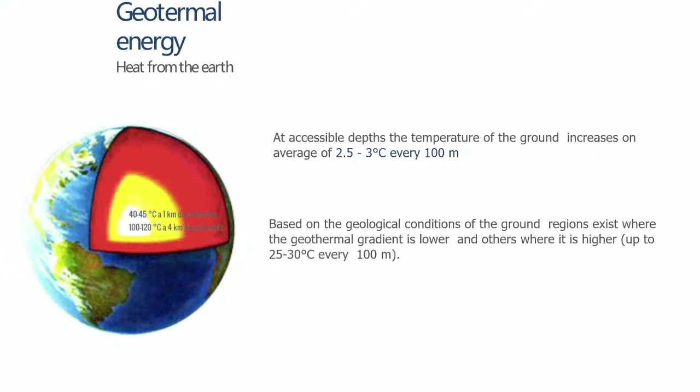In Brazil, not much, but in France, you know that now the temperature is more or less zero and probably will go down to -5, -10. And during summer, we will have more than 30 degrees at the surface. So the idea would be to go to a deeper place where the temperature is more or less stable. And if it's stable, it means we will be able to take the energy from this deeper point. If you have to cool during summer, if you have 36 degrees outside, you will be able to take the energy from the ground, which will probably be at a lower temperature.

And in winter, it will be the contrary. It means you will have -10 outside, and in your soil, probably you will have something like 15. In some places we know we have an increase of 2.5 to 3 degrees, and in other places it can be higher. So it means the efficiency of this technique should first be analyzed and designed. In France, probably we will not have the same efficiency that you will have in Brazil, and probably you will also not have the same needs.

In France, we will have to heat and to cool. Here, heating, not much, if I understand well. Yeah?

Okay, so geothermal energy, people have been using it since the Paleolithic times. The first use was for bathing. When you want hot water, you go bathing, so it's a good idea. Also in ancient Roman times. Nowadays the idea is to try to take energy for electric power.

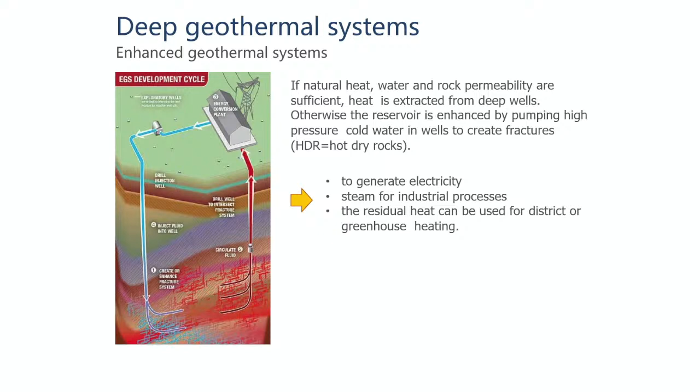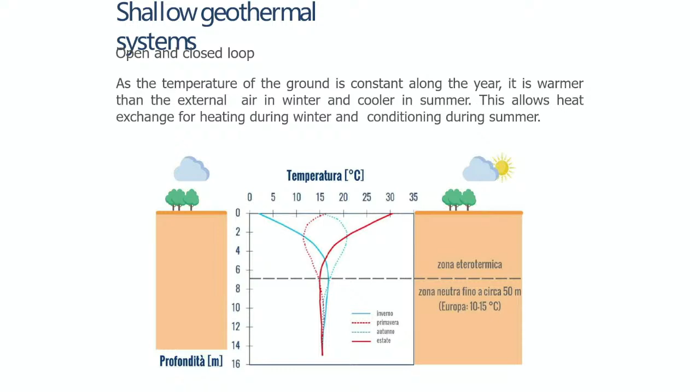So it's very interesting. At the surface, for depths inferior to 6 meters, you see that we have a big variation of temperature. So the idea, if we want to have good efficiency, is to try to have a structure deeper than 10 meters or so. Like that, you will always have a constant temperature, and you can take calories for heating or for cooling.

So it means that if you have very shallow structures at the surface, the temperature of these structures will be modified by the surface temperature, and it will decrease a lot the efficiency of your geothermal system.

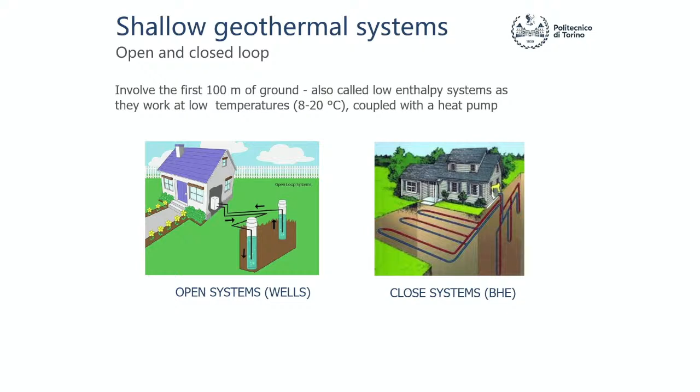So I already told you that we have open systems - these are, most of the time, not so efficient. And we have closed systems, where the input and output tube are connected. So it means that in most geotechnical structures, we will deal with the closed system with the heat pump. We will see the heat pump.

So let's deal now with energy geostructures. In geotechnics, we have more or less three kinds. We have the piles. What is important is the fact that if you have to build your structure, it's not very difficult to add some pipes inside.

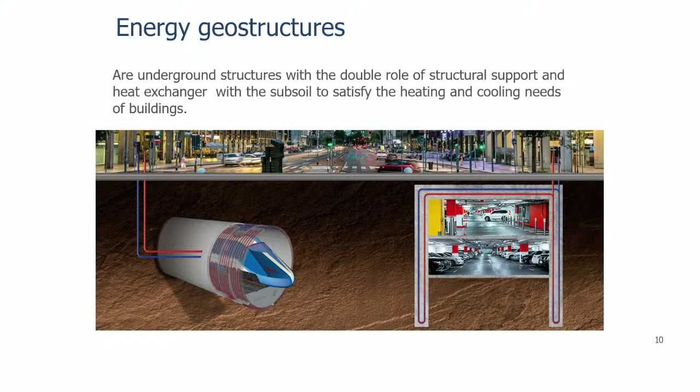In Paris, we have a lot of works now. We have the Grand Paris Express under construction - a tunnel construction of more or less 200 kilometers, so it's a very long one. Plus they are creating more or less 72 underground stations. So it means that we will create a lot of structures that can be linked with geothermal energy.

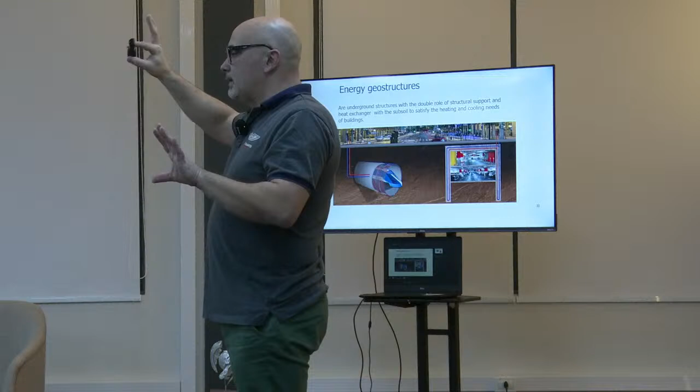But the main problem was the responsibility. They began, in some stations, to try to set some tubes, but in France - when you have to design, you have a controller who oversees it, and as the guy who controls didn't have the experience, he said no, I don't want this, so they stopped. It means that in some stations they began to set the tubes, but had to fill them back in, because the controller with no experience refused to take the responsibility. So in France, we have created a 200 kilometer line plus 72 underground stations with no geothermal energy.

So it's a pity for France, as all these lines are connected to Paris - sometimes they cross Paris, sometimes they are very close, so it's a real pity. It means that sometimes it's not possible, but it's not that it's not interesting, it's more the other parts around which do not permit that.

So I was telling about the piles - that's the first kind, Christina is working a lot on piles. But we can also use another kind of energy geostructure: the parkings. Here you see the parking. What is interesting is that one part of your parking, one part of the concrete wall, will be connected to the soil, so you can take some calories.

This can be a good energy geostructure, but the problem is that sometimes it's not so deep. Sometimes it's just 1 or 2 levels: one level is more or less 3 meters, 2 levels 6 meters. So we don't reach 10 meters to have a constant temperature. The other thing is that you will have some heating inside, so it means that you will reduce the efficiency of the system. Remember, you should be at a more or less constant temperature to take the heat.

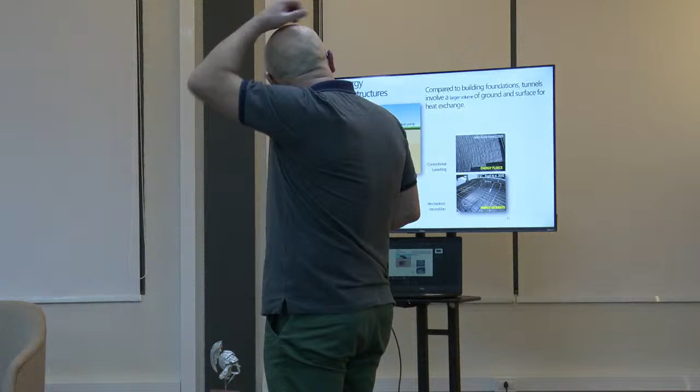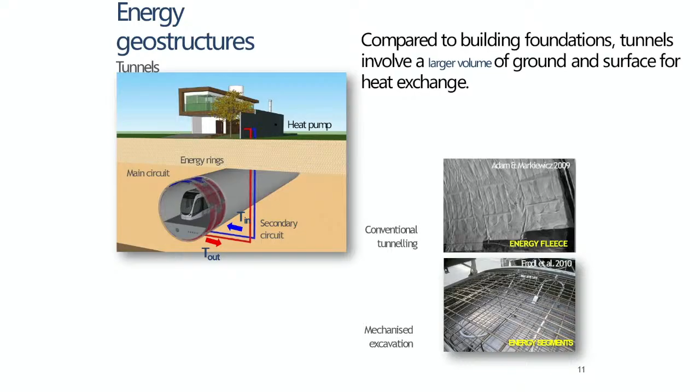Another kind of underground structure is the tunnels. We will see that this is a big possibility, but we don't have a lot in the world. So I will show you some cases. Here is a case, I will show you it again. In Italy, in Torino, one of our colleagues, Professor Barla, has done an experimentation on only two rings. When you are excavating with a TBM, you set rings, and he only had the permission to set 2 rings, and he showed that it works well.

The big problem here, and it's more or less the same as before, is that when you are building a tunnel with a TBM, it will be at least 1 kilometer long. The TBM costs more than 10 to 20 million euros, so you should have a long distance to excavate to be efficient. And then, yes, you will produce energy.

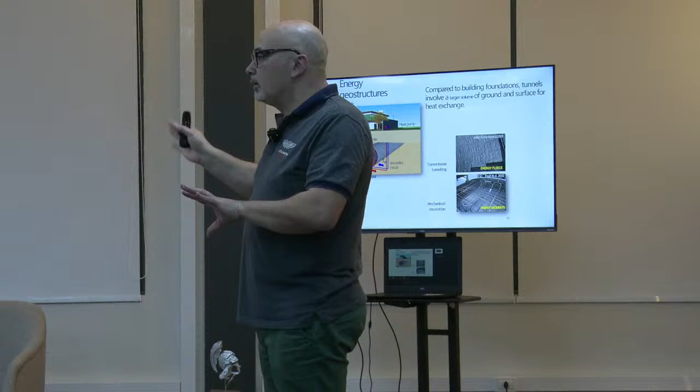But the one who designs and builds the tunnel will not be the owner of the tunnel in the end. So who will take this energy, and do they have buildings to heat and cool or not? It's a big problem also in France, because we have a separation between the one who does the work and nobody takes care of the energy. It will not be the same one who generates and manages the energy, and it's never simple. But in any case, tunnels are probably the future.

Why? In most cases, they are excavated at 5 diameters. The diameter of the tunnel is more or less 10 meters, so we excavate them at more or less 50 meters, which means we are at the right depth to obtain a constant temperature. Also, with a diameter of 10 meters, the surface is very large, and with a length of at least 1 kilometer, it can bring a big amount of energy to the cities.

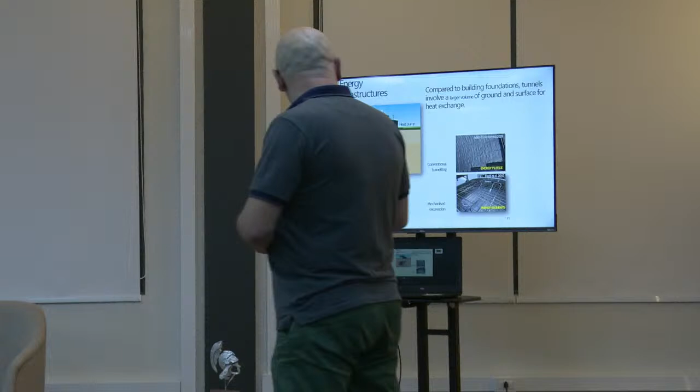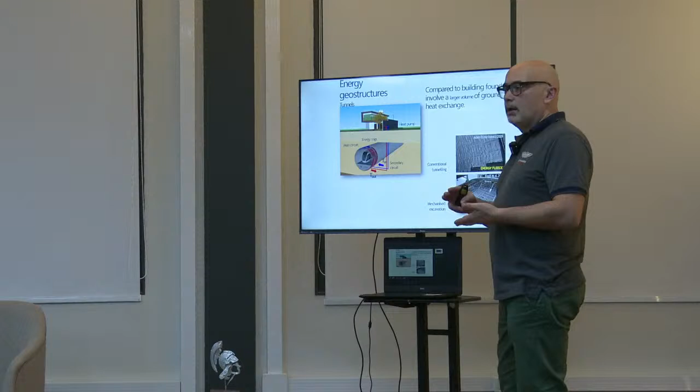Here I have other pictures, and you can see that it's not so complex. You have to set steel rebars to create the rings. The ring for a tunnel created by a TBM is more or less 30 to 40 centimeters thick, so you have space for the steel rebars. Here you see the steel rebars. Then they just add the tubes to allow the circulation of the fluids.

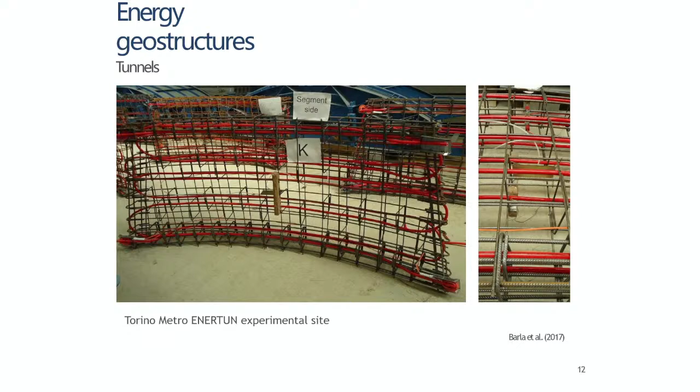Here is another photo of the Torino case. It was an experimental one, and what is more complex is that the ring is made of several segments, so they have to connect each segment, and it's not so easy. It's like Apple pads: some years ago they didn't exist, now you can buy them. Here it's more or less the same. It's just experimental, so it takes a long time to develop and implement. But if we decide to go ahead, they will be efficient, they will bring a lot of energy, and the cost will reduce.

In this experiment, it was complex because they connected normal rings with rings with tubes, so it was not easy to set up in Torino. If we look around the world, there are not many energy tunnels. The bigger ones are Torino, though remember it's only 2 rings, the Katzenberg tunnel, the Nanaori tunnel, the Seocheon tunnel, the Linchang tunnel in China, and the Lainzer. So there are only 5 or 6, not many.

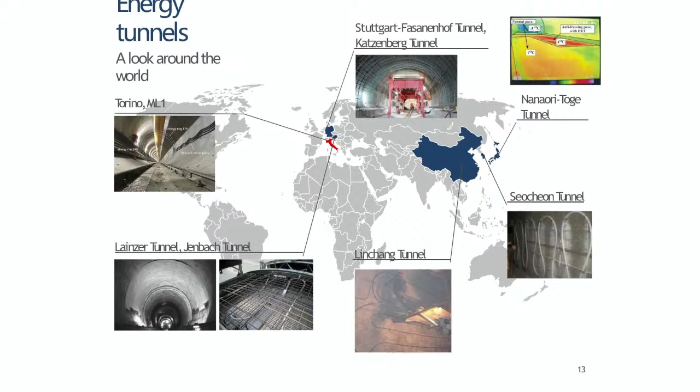Another kind of energy tunnels which can be used are the ones on the pipelines or the sewage systems. Means that yes, you can have fluids, and we can take some energy from the sewers. Sure, the efficiency will be lower by the fact that your sewers will probably be at 3 to 4 meters, but you can also bring some energy from these ones.

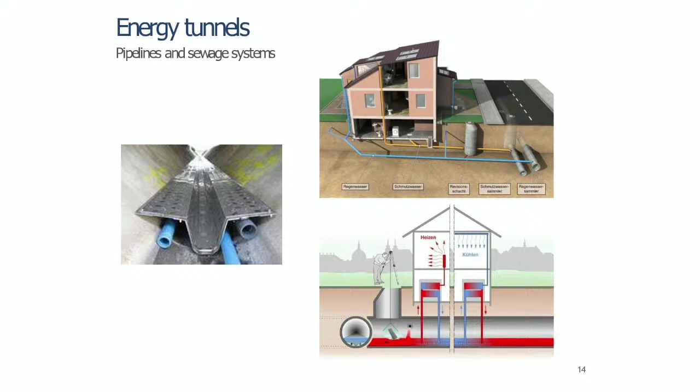So the good thing is also the fact that we will save a lot of CO2 with this kind of energy. You know that it's in the ground, so we just have to take it, in fact. So it's not like we will have to take the coal and burn the coal, or the oil. We can say that it's more or less a clean energy or a green energy, not like coal or other things.

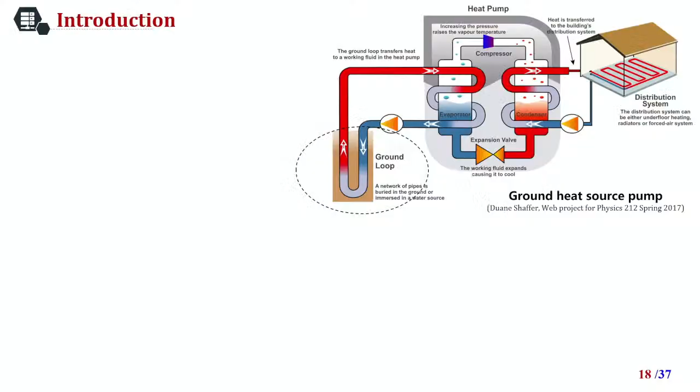Okay, so it was an introduction to geothermal energy, geothermal structures, and energy tunnels. Let's deal now with a small piece of what we have done in this PhD. So in all the cases, we will have to circulate a fluid in the tubes. We will set a fluid at a lower or higher temperature. You will take the calories from the ground and then bring them to a heat pump. The heat pump is necessary, and we will have to give some energy to the heat pump to condense the calories. So the heat pump is probably the main part of the system, and its efficiency is very important.

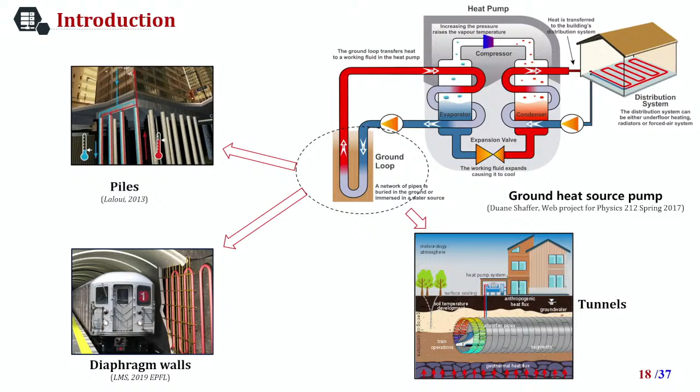I'm a geotechnical engineer, so I don't want to manage that; I suppose a lot of other people will do better than me. So here I will focus only on how we will be able to take the calories from the soil. Then the heat pump will be connected to structures to heat or to cool. I already dealt with the piles; the pile is the most common energy geostructure. Then you have the diaphragm walls, which can be new or older ones. If you have to renovate them, you can probably recreate a lining in front with some pipes. And the tunnels, we already dealt with.

We have two kinds of tunnels, so I will introduce these two kinds a little bit. I don't know if you have had a course about tunneling. No? You know the difference between conventional and mechanized tunneling? I feel that I am tired. No?

So this one is the conventional. In conventional tunneling, you can use normal machines, meaning trucks, scrapers, classical machines. But in this case, the soil should have cohesion, meaning it should be stable by itself. I will excavate step by step. We will set steel rebars, probably sprayed concrete, but at the face, the soil should be stable by itself.

We can help the face a little by using steel bars or fiberglass bars inside, but you should have some cohesion. If you have no cohesion, we will not be able to do conventional tunneling. Another big difference: conventional tunneling can be used for smaller lengths. So if I have to deal with 100, 200 meters, in most cases I will do conventional tunneling.

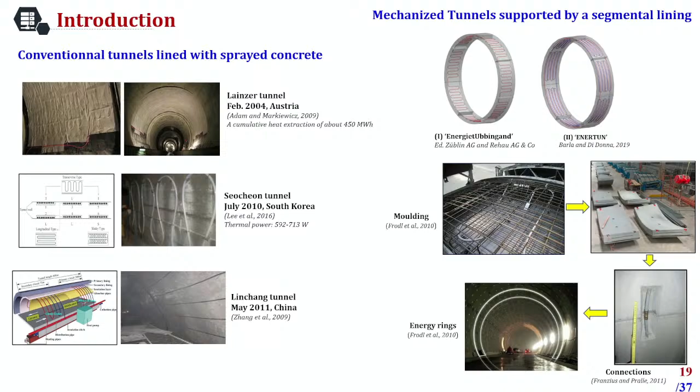In this case, the TBM will do everything. You excavate, it protects behind with a shield made of steel that blocks the movements, and behind, the TBM is able to set the support. But it's not a temporary lining. The TBM will directly set the final support. That's why in this case you should create your ring elements and introduce the tubes directly in the rings.

Here we have two big experiences for mechanized tunnels. One, the ENERTUN, was the one for Torino. In this case, the tubes are perpendicular to the excavation direction, and here they were parallel. This one was built before this one. In fact, it's very difficult to compare the efficiency, as it depends a lot on the depth, the temperature, your demands, and the difference of temperature at the surface. So here you have more or less the same.

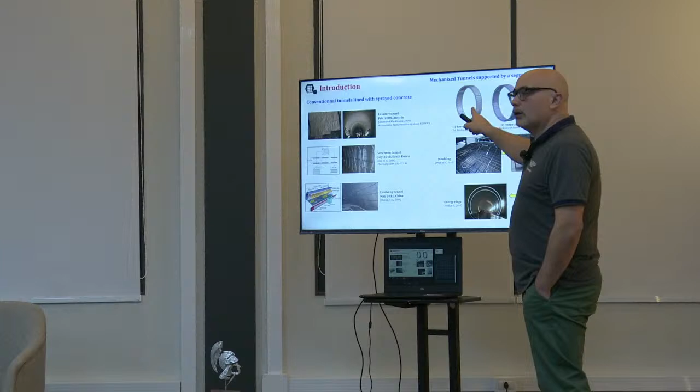And what is interesting here: this is a segment. You see that they are composed of different segments. Here you should have a connection. So you should prepare the connection and then finish the connection between the elements. This is not so easy to set up. This one I already showed you.

So let's focus now on what we investigated in this research. The first thing is the hydraulic conditions. If you have a system, like a pile, and you are always taking the calories, the temperature around the pile will probably change. So it can be nice to have a water flow, which will restore the temperature and increase the efficiency of your system. For tunnels, it's the same. Our idea was to investigate the role of the hydraulic conditions: is the water table above the tunnel, at the level of the tunnel, or below it? The idea was to check numerically the difference.

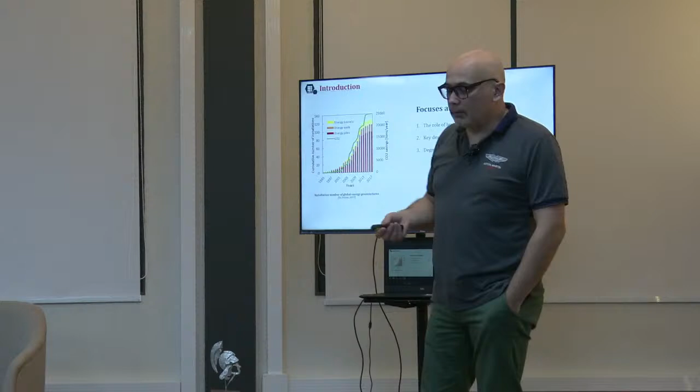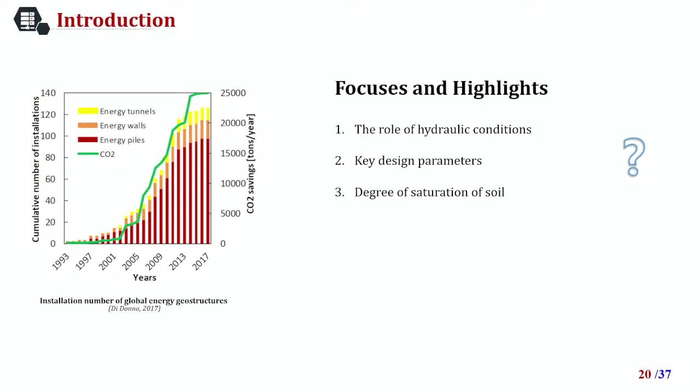I will show you. We began with this condition, and then, as it is numerical, it's not difficult to tune the parameters. So we tuned some parameters, and I will show you the influence of some key design parameters. The last thing is not very new work, as it was published probably in 2021. Probably a lot of people have done better things, but we tried to investigate the role of unsaturated soils in this case.

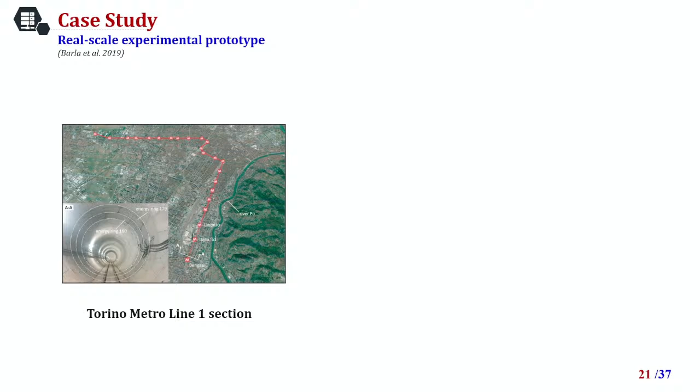Our case study: in the team was a Chinese student, Chen Jingma, and also Alice Di Donna, who is a professor from Italy. During her PhD, she worked on the Torino Metro Line 1. So we had the case, and our idea was to take the data from this case, model it, try to have a good agreement with the data, and then, using this good agreement, extend it by numerical analysis to check the influence of the design parameters. So the case is there.

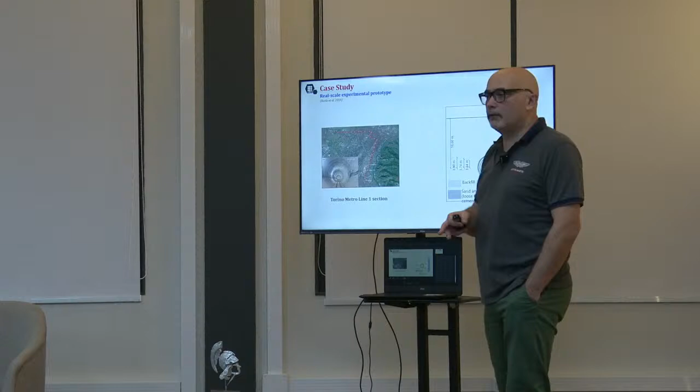So the tunnel is more or less, you see that it's the excavation. So the excavation is there. It's 3 meters 90, so more or less 4 meters. So it's an 8 meters tunnel of diameter. It was made by a TBM, so means that the TBM always excavates a little bit more than the size of the segments. So the size of the excavation is 3 meters 90 for the radius. The interior size of your segments is 3 meters 44 here, and here you have 3 meters 74.

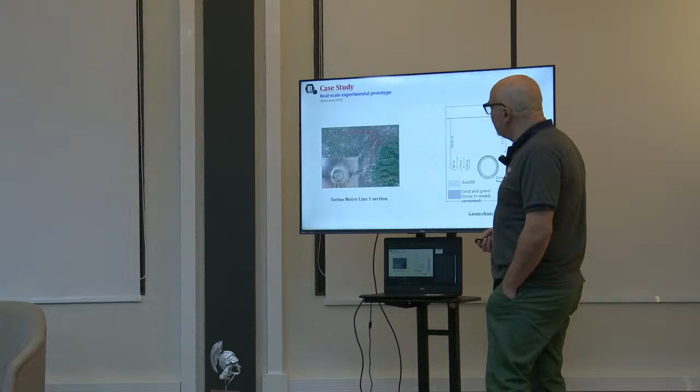So it's not a big diameter. In France, all the Grand Paris Express, the tunnel diameter is 10 meters. This one is a little bit smaller. The soils were made of sand and gravel, so it's important by the fact that the permeability of the sand and gravel is high. It's not like in a clay.

Yeah, in a clay you can have a groundwater table, but you know that the water flow will be limited by the permeability of your clay. If the permeability of the clay is 10 minus 9, the flow will not be higher than 10 minus 9 meters per second. So it was a good case by the fact that it was sand, so the permeability can be 10 minus 3, 10 minus 2 meters per second. So it means that it was not the soil that was the limiting factor, probably more the flow of the water.

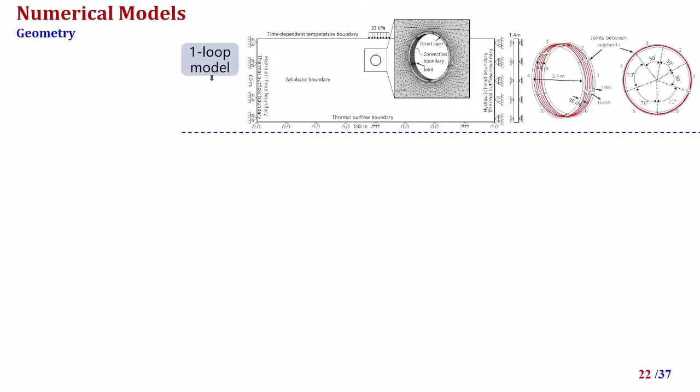The water table was just on the top of the tunnel, and then we had some backfill, but this zone is not important. You remember that in this zone the temperature will vary, so it's not very important for the geothermal calculations. I will go quickly on the numerical models. We have done, in fact, 3 kinds of models. I will not discuss much the one-loop model, but we didn't have a lot of experience using COMSOL, and it's not so easy to use COMSOL.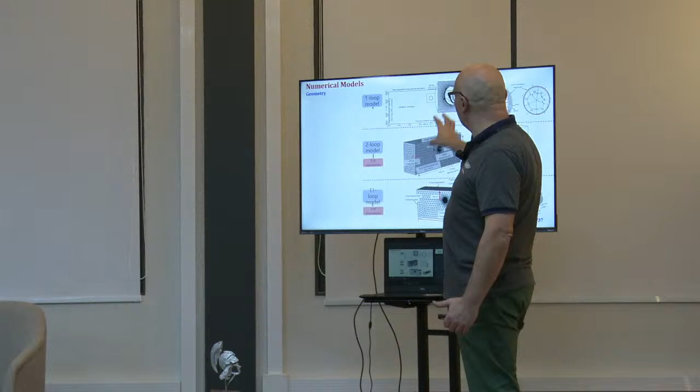So the idea here was to reach the long-term properties. Means that when you are working in 1 meter length, we can reproduce all this, so for us it was just doing calculations at long term to obtain the efficiency at long term. I will not deal too much with this one. I will deal a little bit more with the 2 other ones. The second one was used to calibrate on the experimental data. Remember that the data on the tunnel that we had was two linings, two segments. So we used this one to compare it to the results that we have on the site, and we have done

thermo-hydraulic calculations. In fact, in this case, you can say that probably it will be better to do thermo-hydraulic mechanical calculations. But here, the settlements, the displacements were not really high, and I'm sure that to obtain the power efficiency, it's not necessary to do a mechanical calculation.

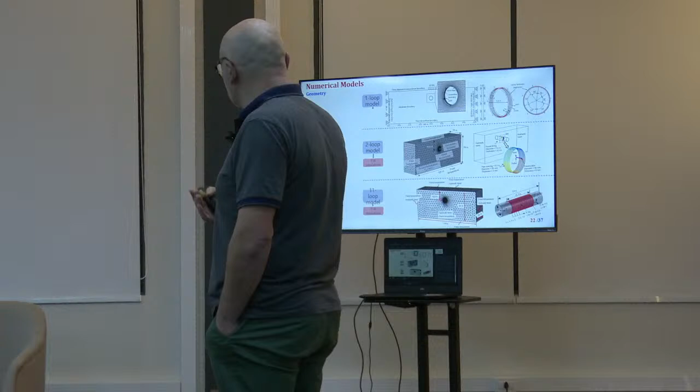The mechanical calculation will be more done by the geotechnical engineer to be sure that it's stable from a mechanical point of view. For the thermal efficiency, what is important is the thermo-hydraulic calculations. We can separate them easily. A lot of people already showed that. And then we have also used a bigger model, 11 loop model, more to check the transient effects on this section. So I will deal more with the 2 loop and the 11 loop.

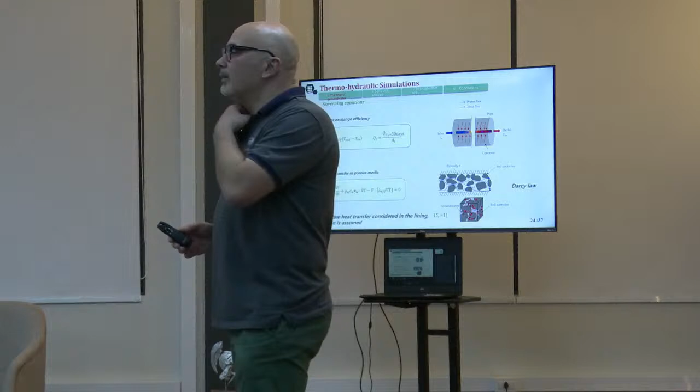So let's go for the role of the groundwater. In all the cases, we should consider what are the mechanisms inside. So we have the concrete and you have the soil. In the concrete, I wrote it here, we only consider the conductive heat transfer in the lining, and we have considered no convection in the lining. So of these 2 mechanisms, the conductive heat transfer is important for the lining, not the convection. For the soil, we have considered the 2 mechanisms.

So the more mechanisms we consider, the more parameters you need. I will not deal too much with the parameters. The specialist for how to take the parameters is more Christina. Remember that I'm more a guy from numerical. She gives me the numbers and I can do the calculation. But without her, my calculations will be very bad. Remember that.

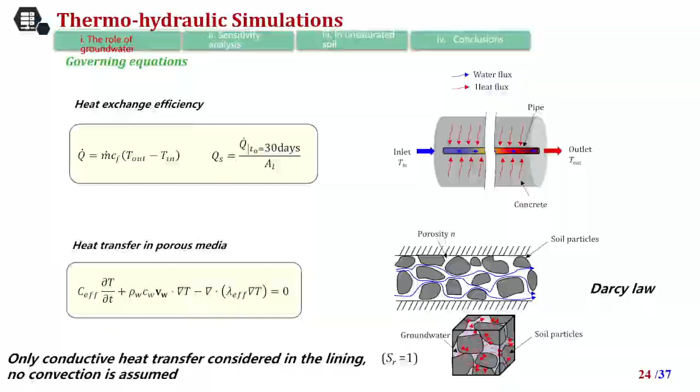For the water circulation, we have used the Darcy law, and in all these calculations we have considered that the soil was saturated. So no unsaturated soil for these calculations. What is important to calculate the heat exchange efficiency is the output temperature and the input temperature, and these are parameters from the system. I will not deal too much with them.

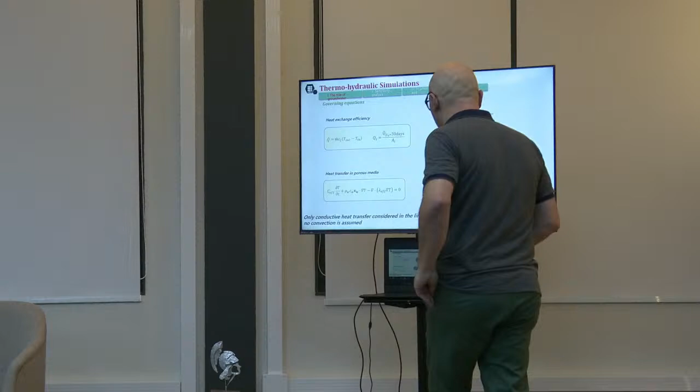Okay, so for the calibration we had the experimental input temperature, the experimental output temperature, and then we have done some calculations. Insana and Barla have already done some calculations, and for this first step, our goal was to be able to obtain more or less the same thing. So we reached our goal.

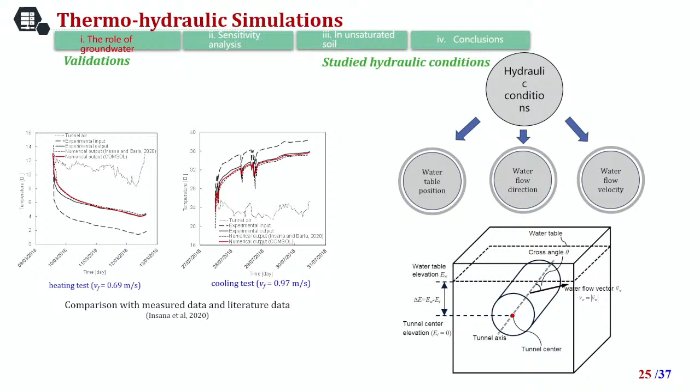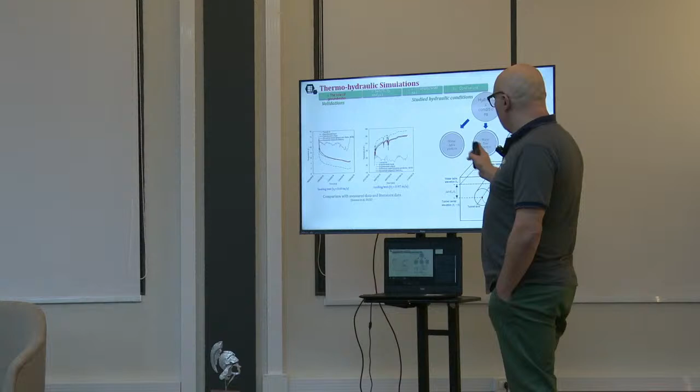You see that here for the heating test, we have more or less the same as the experimental output, and here also. So using this data model, using the mechanisms that I told you, we were able to predict what was measured on the site. Then, based on the fact that we have validated our numerical calculations, we decided to check the influence of the water table position.

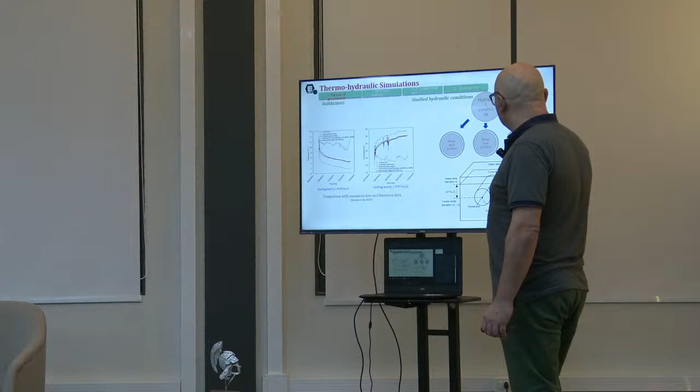So here you see it's this parameter, the delta E. It's the height of the water and the height of the center of the tunnel. So we have considered some positive values and some negative values if the water table is down. I will show you the values that we have considered. Another parameter which was important for us was the water flow direction.

So the tunnel is like that. If we have a water flow like that, probably the effect will not be the same if the water flow is like that or like that. And you know that in the real case, the tunnel path will not follow the water flow. Probably I have to go from one station in Torino to another one, and the tunnel path is the necessary one to go from point A to point B. It will not follow the groundwater flow. So our idea was to check what will be the influence of the water flow direction.

The other one was the water flow velocity. It's easy to do it numerically. In the field, the water flow is the water flow. You cannot change the water flow. Yes, you can stop it. If you do some injections or you reduce the permeability, you can stop it. But the idea is not to stop it, it's to increase it. And it's not possible. It's only virtual. So it's why I told you, yes, I can change the numbers, but she will tell me, no, not possible. Okay, these two parameters were part of our study.

So I will show you only the results of the 11 loop model. Why? It's also for this goal that we have done the 11 loop models. If you only do a 2 loop model, you will have some boundary effects. So it's why we have extended the tunnel, to not have this kind of effect. Here you can see the effect of the water table position. You remember the delta E?

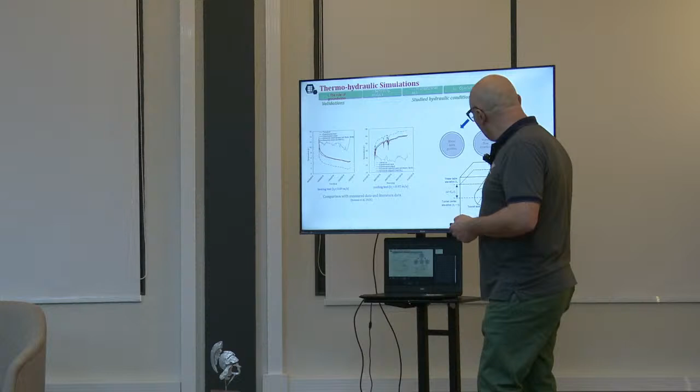So here the 1.5 R means that the water table is upper. R is the radius of the tunnel. So if the delta E is superior to R, it means the water table is upper than the top of the tunnel. And if it's negative, it means we will not have more or less water table. Okay. So here, what we can see is that we have an increase if the water table is higher than R, meaning the water table is upper than the top of your segments. And you can see a big increase.

Here it's the efficiency in watts per square meter, and we can see that in most cases, if you want to have a good efficiency, the water table should be higher than the level of the tunnel. So it means that if you have some parts of the tunnel which are not under the groundwater, probably it's not necessary to insert tubes. Okay.

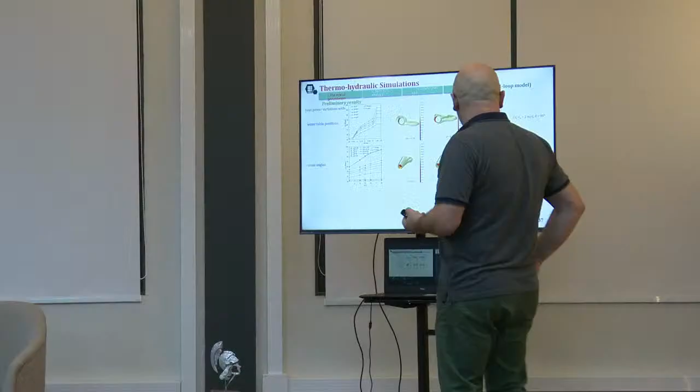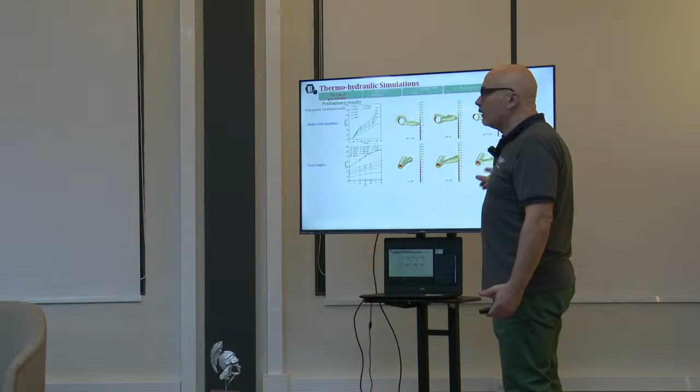Then the cross angle, and here it's 90 degrees. When it's 90 degrees, the flow is perpendicular to the tunnel, and you can see that if it's 90 degrees, you have the better Q. So if you want to have the better efficiency, it's better to have a flow which is perpendicular to your tunnel. The flow will refresh automatically your tunnel. Like that you will always have more or less the same temperature around your tunnel.

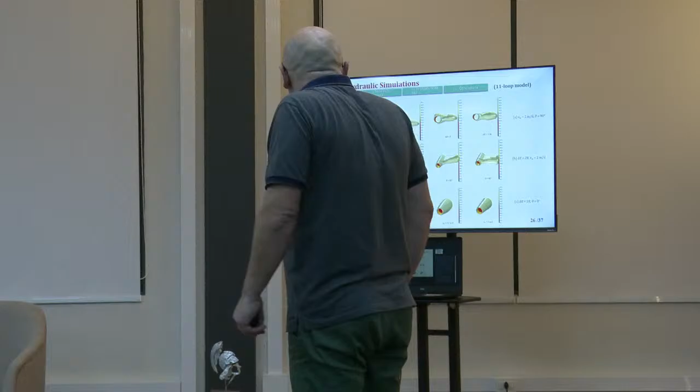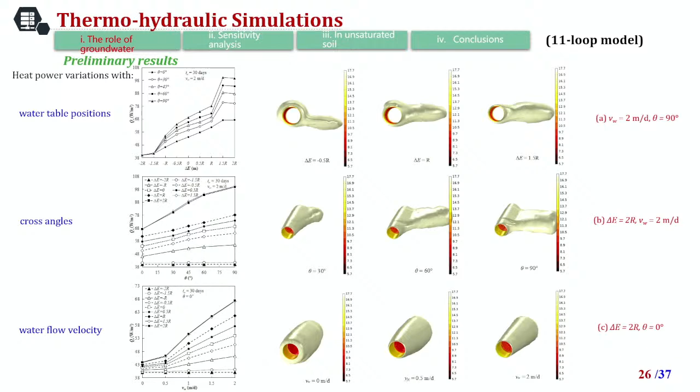And the last parameter was the water flow velocity. Yes, but it's normal. The bigger the water flow, the bigger the QS. So it's normal, but this parameter is more a numerical one. I cannot change it. I cannot tune it. I can tune it on my computer, but that's all.

Okay, using all these results, we have done some tornado diagrams. We have defined the base case.

The base case had the direction of the flow at 45 degrees. The tunnel is there, the water flow is there, at 45 degrees. The velocity was 1 meter per day, and the delta E was minus the radius, meaning more or less no water at the height of the tunnel. We have done this for three.

Then we compared 3 cases, and in all the cases, for the 11-loop, with delta E equal minus R and delta E equal 0, we see that the most important parameter is delta E. The diagram is bigger, so it's the first main parameter. The second one is the velocity, and the third one is the direction of the water flow.

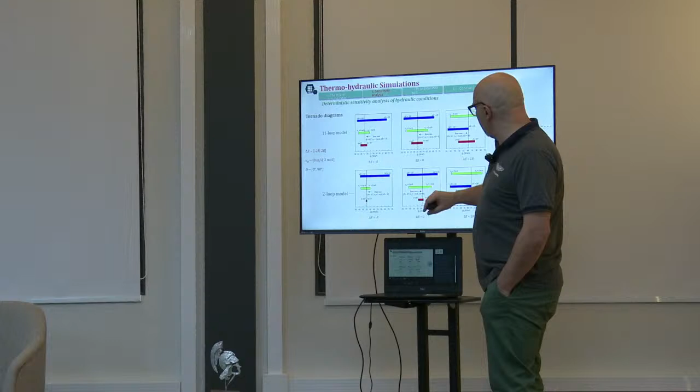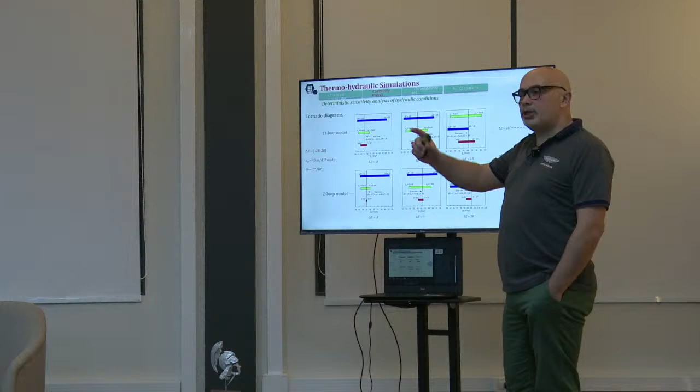We have more or less exactly the same conclusion for delta E equals 0, comparing the base case with this case. But when we have a water table which is higher than the tunnel, we see a variation, a change in the ranking of the parameters.

The velocity becomes the bigger parameter. Yes, when you have water, things change. So this one becomes the bigger factor, and the flow direction is no longer the bigger one. Its influence is not so big, and we obtain more or less the same result for the 2-loop model.

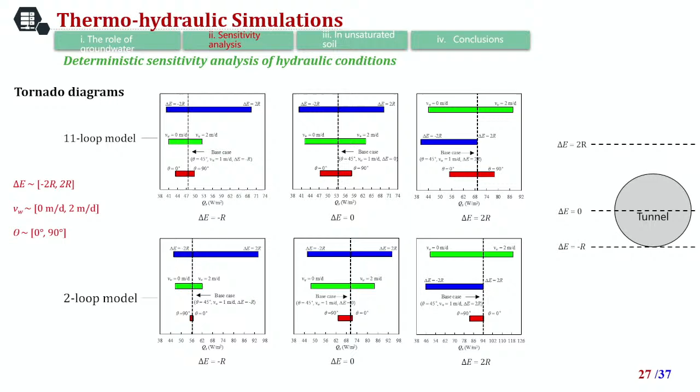We have done it for the 2-loop model. The idea was to check if a smaller model can also reproduce what was obtained in the 11-loop model, which is more rigorous. We didn't have these boundary effects on our model.

So this one was a classical deterministic sensitivity analysis. Then we have done a probabilistic sensitivity analysis of the ground parameters. In this case it was a little bit more complex, so we developed a routine coupling COMSOL with MATLAB.

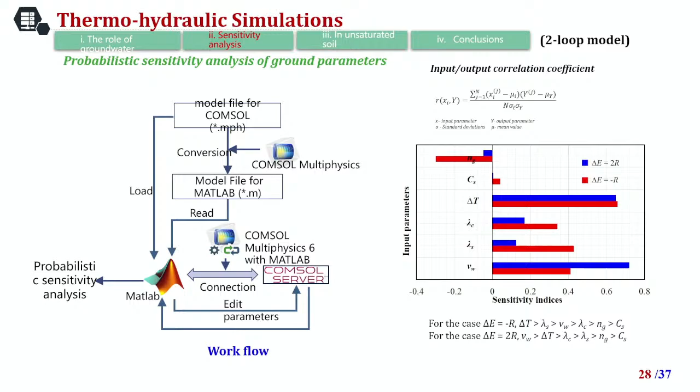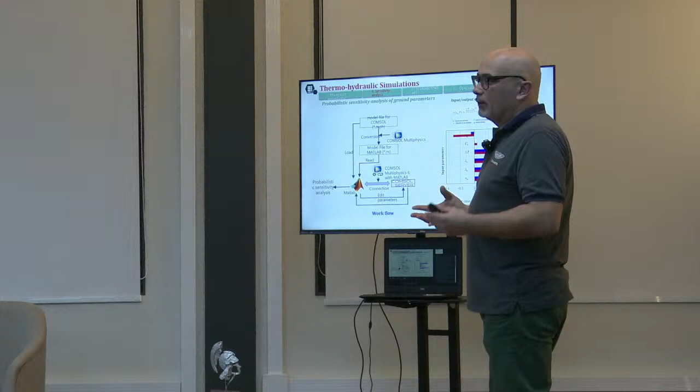In the deterministic case, we modify one factor at a time, meaning when you modify this factor, the two others are held constant. In a probabilistic analysis, the idea is to see what happens when everything is moving at once, so we had to define a more complex system.

With this more complex analysis, we have the variation of temperature, meaning it depends a lot on the site, since we change the input and output temperature. The temperature variation and the water velocity are the two main parameters from this sensitivity analysis.

Last point was the unsaturated soils. In the Torino case, we didn't have measurements of the water content versus the relative humidity. We took some curves from the literature, and the idea was to try to show the influence of the unsaturated soil. I've covered the questions, so I won't dwell on that too much.

Here we considered 3 kinds of soils: sand, silt, and claystone. The soil of Torino was more a sand, but we extended the cases a bit more by using two other soils.

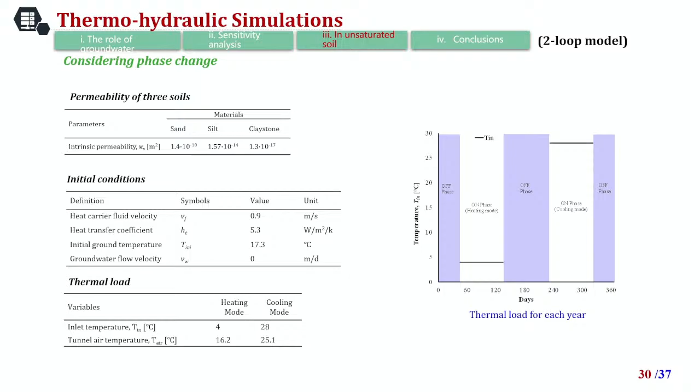We had to define some parameters like the heat carrier fluid velocity, the heat transfer coefficient, and the initial ground temperature. These were defined as constants, and we defined some thermal loads for each year. So the temperature is here: we set a period where everything is off, meaning no change of temperature, then an on phase with heating mode, then we stop the process, and a cooling phase. This means we did several steps just to see the influence of time on the system.

The change in degree of saturation was not so big. You can see that the higher one is 0.003 to 0.007, and it depends a lot on the time you are doing your calculations, meaning we have done 1 year, 5 years, 10 years. You can see that the change in the degree of saturation is not really big using unsaturated soils.

The other result was we checked the initial degree of saturation. We took 0.2, 0.5, and 0.8. With 0.8, we have more or less no influence with time. We have a bigger influence with 0.5, and an even bigger one with 0.2. So the main parameter which is important in this study was the initial degree of saturation. We should know with good accuracy what the initial degree of saturation is to be able to see the change in this degree of saturation with time.

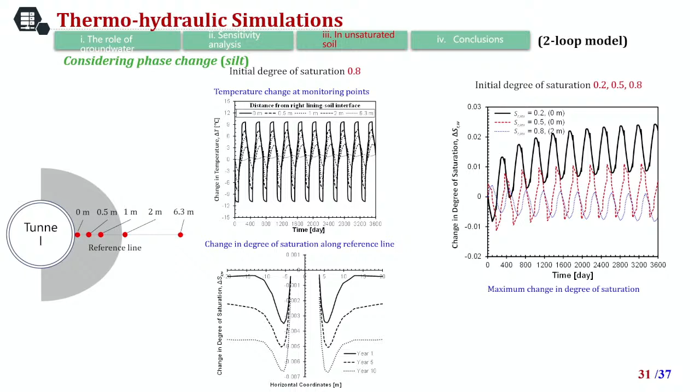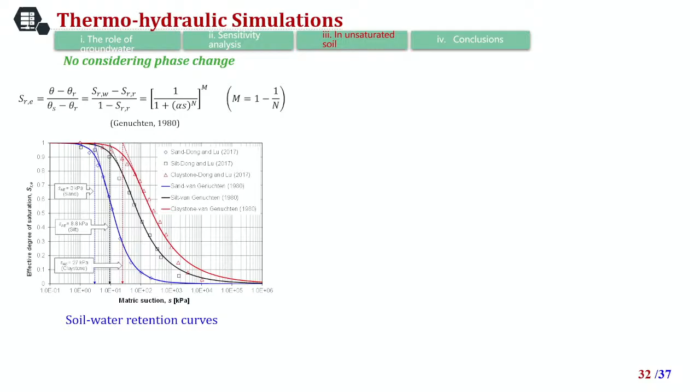Then we also had to introduce the matric suction, the effective degree of saturation versus the matric suction. Same remark, we took the curves from the literature. Yes, it's real curves, but they're more curves from the literature. So we use this curve, and as we had sand, silt, and claystone, we use the sand, the silt, and the claystone.

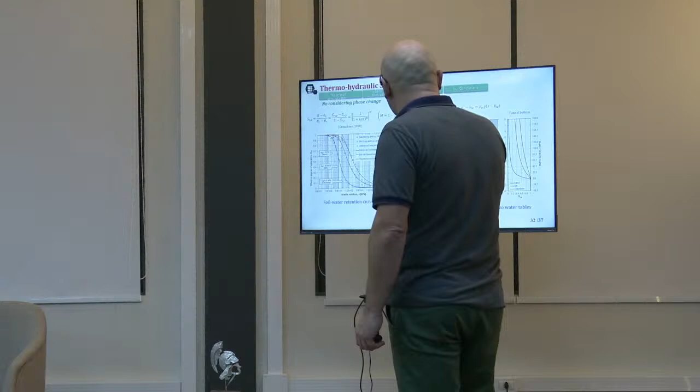You see that we have a different matric suction depending on the soil. It's classical curves that you can find in the literature review. Here we have, down, the saturated zone, and here in the upper part, the unsaturated zone.

You can see that when you have a delta E equal to R, the changes that we have in the saturation are a variation of the saturation. For the sand, we have a bigger variation of this saturation than for clays. It means it will take much more time due to the fact that the permeability is lower, so it will take much more time to have a big variation of this initial saturation parameter.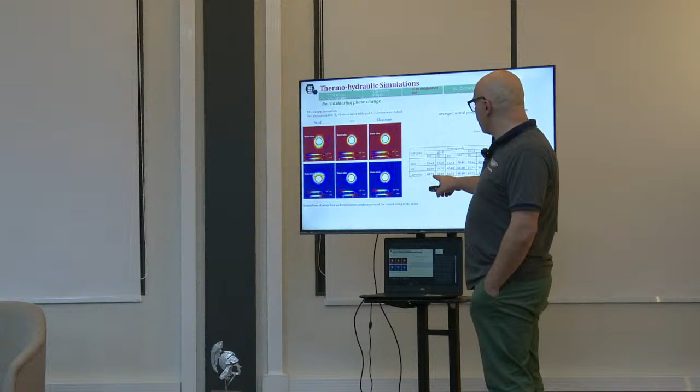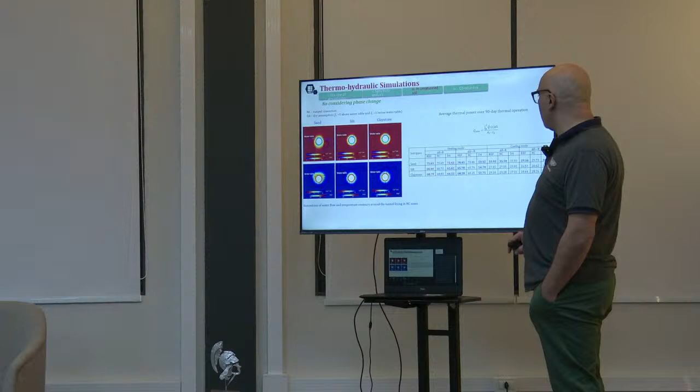Then we calculated the thermal power, and the thermal power is not so different. In fact, it was strange for us because here we have a big difference, but for the thermal power, the difference is not so big between sand and claystone for delta E equal to R. The difference is more or less the same. It's lower for delta E equal minus R for the heating mode, and we had more or less the same result for the cooling mode. So it means that using the unsaturated parameters, we didn't find a lot of variation in terms of thermal power.

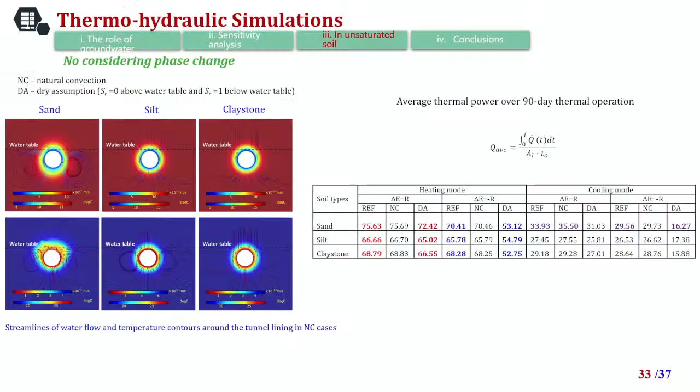Now, the conclusions. I tried to show you that the water table is the most important thing. I don't know what the rules are here in France, but when you have to do this kind of tunnel, you should know at least the level, the groundwater level. You should set some piezometers at least 1 year before the beginning of your work. That way you will know it's very important, because during the year you will have cycles and you will also change your efficiency. In my calculations, I didn't take the cycles, I just took a constant level. So it means the water level will also influence your system.

And in France, we have much more levels. If you have a flow, a water flood, you can have a bigger level, but the water flood is an accident, it's not something that will stay a long time. So it's not the one which should be used for the design of this kind of structure.

Then I show you that when the water table is higher than the tunnel top, the water flow velocity is the most sensitive parameter, and it's not always the case. Be careful: if the water table is down, it's the water table which is the most important parameter. Otherwise, the temperature difference between the pipe inlet and the soil is the most sensitive parameter.

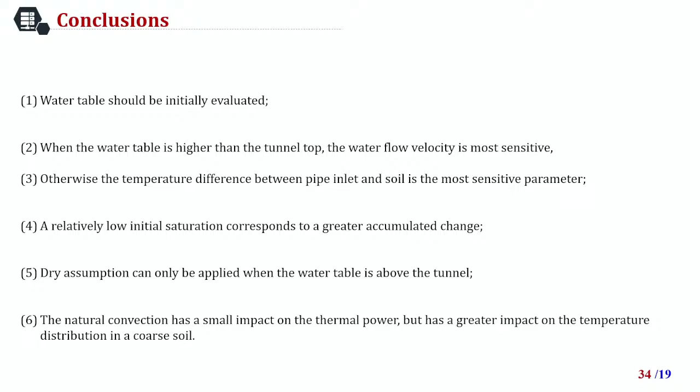And natural convection has a small impact on the thermal power, but has a great impact on the temperature distribution in the coarse soil. This conclusion I just mentioned, I didn't illustrate it, but it's in the PhD thesis, so if you're interested, we have done some calculations to consider the convection or not and show what the difference is.

And that's all for today. Thanks a lot.